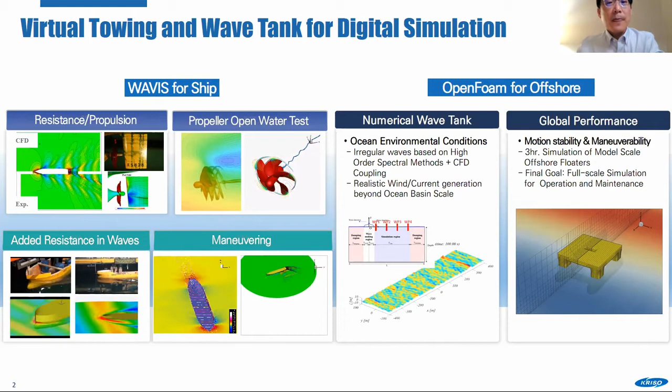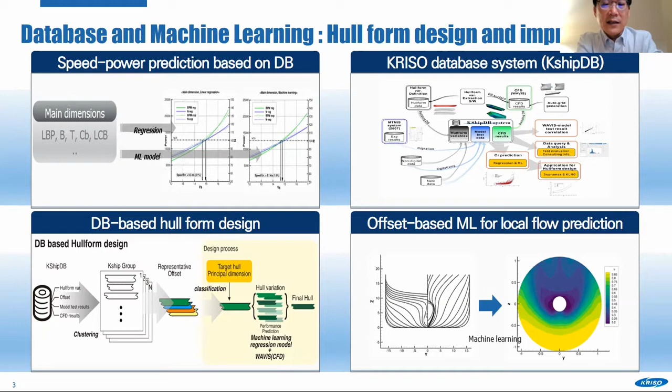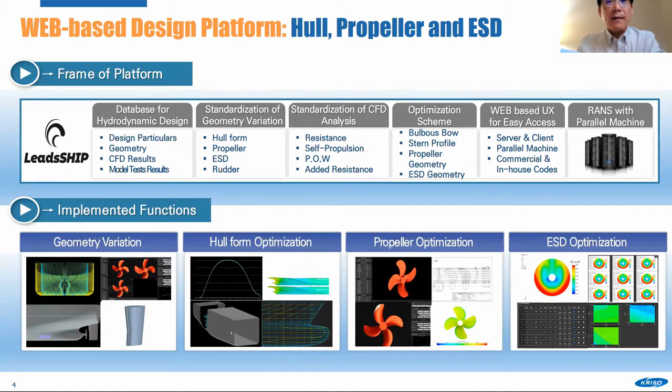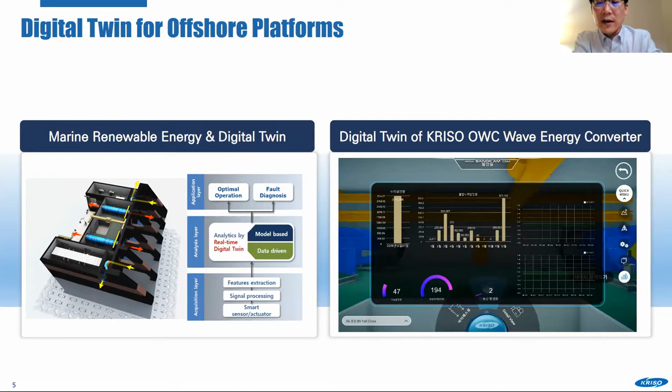KRISO has a pilot OWC wave power plant in the west of Jeju Island, Korea. Currently, it is producing electricity based on the ocean waves, and we are making efforts to increase the capacity factor. The wave power plant is being monitored in the form of a digital twin, as you see in the right-hand side figure. And efforts are being made to innovatively improve the control and monitoring of the system in the near future.

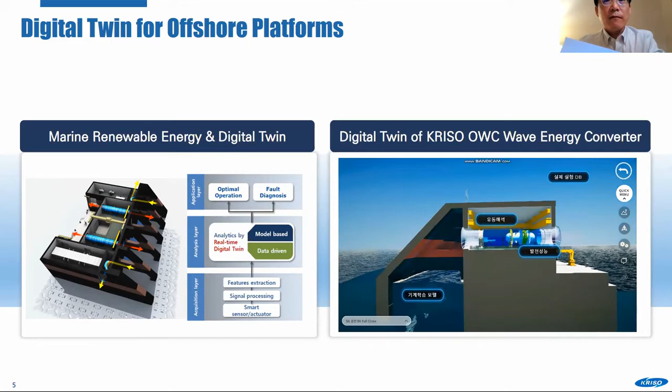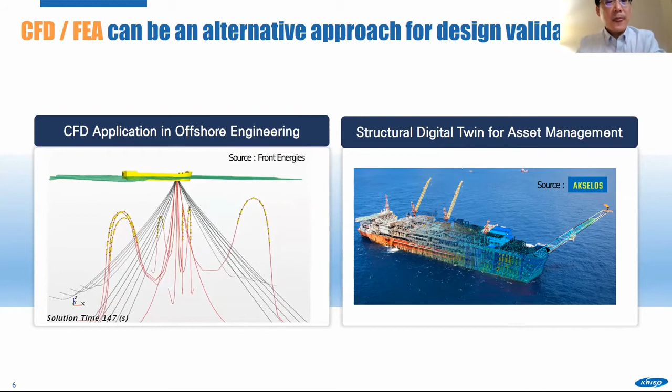I want to bring up several remarks to summarize my talk today. Digitalization is a very essential and inevitable technical area for competitive ship and offshore design. I think digitalization can provide the maritime industry with better design, better performance and efficient solutions. Digitalization will contribute to the recent driving force of ship and offshore design for safe, autonomous, and zero-emission technology.

In my opinion, in upcoming years, standardization, reliability, accessibility, and security of marine digitalization for marine hydrodynamics should be addressed, and what to do should be discussed in terms of ITTC aspects.

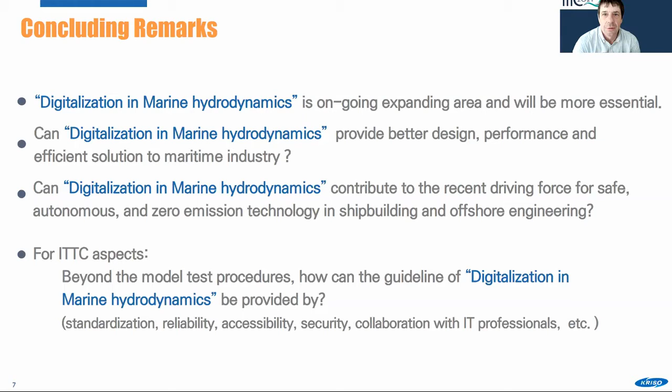Thank you very much. I hope you can see this properly. Yes. Thank you also, Bookie Kim, and I can recommend everybody to have a look at the video, because it's a very complete, good overview of what is happening in the field of digitalization.

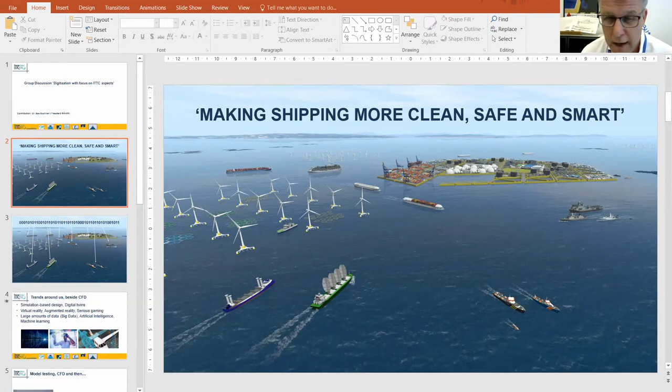I'm complementing the presentation by Bookie Kim with my presentation, where I start with the actual objective of our field in hydrodynamics, and that is, if I summarize it, making shipping more clean, safe, and smart. And we can be sure that digitalization will be a very important part of our field.

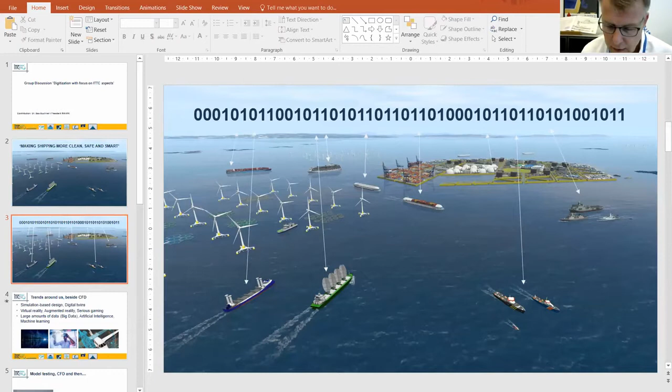And if you look to the trends around us: simulation-based design, digital twins, as Bookie Kim already referred to, but also virtual reality, augmented reality, and related to that, serious gaming will be important. And of course, handling big amounts of data, artificial intelligence, and machine learning are very important in the trends around us.

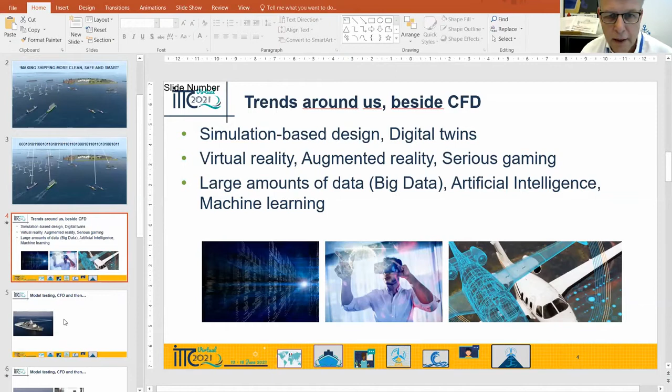And if I then look to the situation of a typical operational problem, in this case, I have a bit of a problem that I see something else on the screen. The sheets on the presentation are different from what I'm presenting. What do you see, just for checking, Pierre? Model testing, CFD, and then. Yeah, okay, that's good. Then my screen is stopped. Okay, then that's fine. I just proceed.

But if you look to this problem, a complex frigate in a maneuvering sequence, then we used to analyze that by model testing.

There's something wrong with the system, I'm afraid, because this is not a moving video.

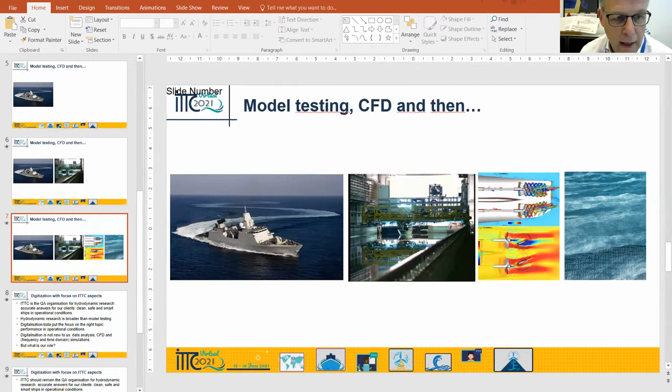And after the model testing, we are focusing on the application of CFD, and after that, we will see the application of data. And if I then focus on the challenges that are ahead of us, and you look to the challenges for ITTC, we can state that ITTC is a quality assurance organization for hydrodynamic research to give accurate answers to our clients. So clean, safe, and smart ships in operational conditions.

And we all know already that hydrodynamic research is broader than model testing. And I believe that digitalization and the use of data puts the focus on the right topic, and that is performance in operational conditions. So not just the design conditions, but more importantly the performance in operational conditions. And one of the other things is, of course, that digitalization is not new to us. We have been looking at advanced data analysis for a long time, CFD, simulations, both in frequency and time domain.

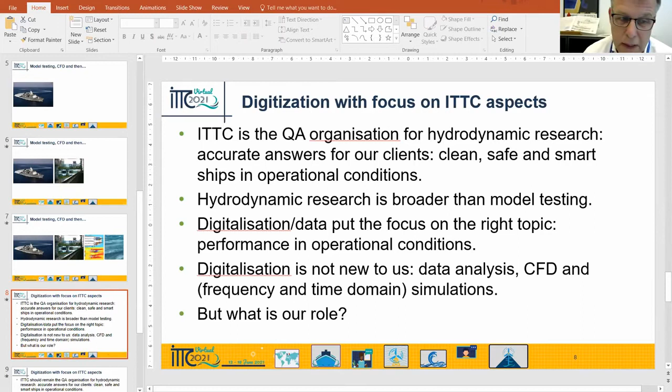But the question is, what will be our future role? I think that the ITTC should remain the quality assurance organization for hydrodynamic research, because in the end, the goal is to have accurate answers for our clients. And digitalization requires other types of expertise: CFD, simulations, data science. And we also have to admit that we do not have all that expertise ourselves now. And the question is, how do we develop that expertise?

And importantly for ITTC, should we extend the membership to other parties that perform hydrodynamic research, not with model basins, but maybe based on data? And then the question is, who will be that future partner? So there is a big challenge in quality assurance for CFD and data science compared to model testing, because water molecules are the same everywhere, all around the world, but numerical models and data analysis algorithms are not. So how do we deal with it? The challenge for quality assurance is probably even bigger than what we have with model basins.

And there's of course also the question of the quality of the data, and how do you define the quality of data? And one of the big challenges for me, if you look at data-driven solutions compared to model-driven solutions, is that the algorithms come with a relation between the data and the things you want to understand, but the explainability of what is happening in the methodology is actually pretty limited. And the question is, do data-driven solutions actually provide predictions? And finally, an important question to be discussed is, how do we get safe access to the data? So I hope these questions stir up some discussions between ourselves and with the audience.

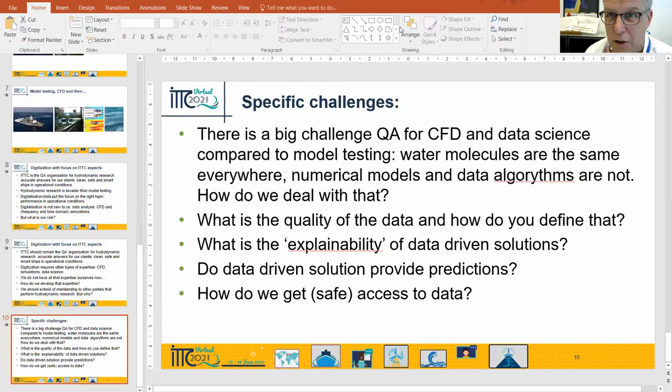Thank you. So yes, we have at least two written questions. My duty is to read these questions, and yours would be to answer them. First, there is a question by Young-Won Kim: ITTC has been an organization which has made the procedures for experiments in the past, and currently we are doing many activities for numerical computation. Do you think that we can extend such activities to make procedures related to digital-based analysis? That is, should ITTC create standards such as guidelines and procedures for digital techniques and analysis? This mirrors some of your words, Bas, and maybe Buki. Bas, can you go first?

Okay, good point there, Buki. As I mentioned in one of my first responses, I think we have a responsibility, because if you want to give reliable answers to your clients, and we have to use the latest tools from CFD, time domain simulations towards data science, we have to work together to come up with a good framework for quality assurance. So it is our responsibility.